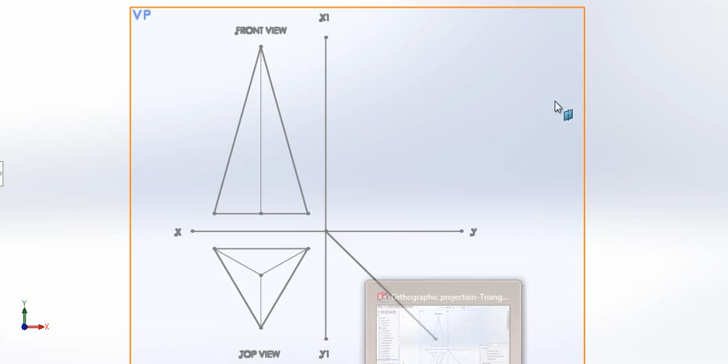Hi there guys, we are back with the orthographic projection of a geometric solid. In our previous videos we've actually shown the actual solid shape, and I'm going to do the same in this video for understanding.

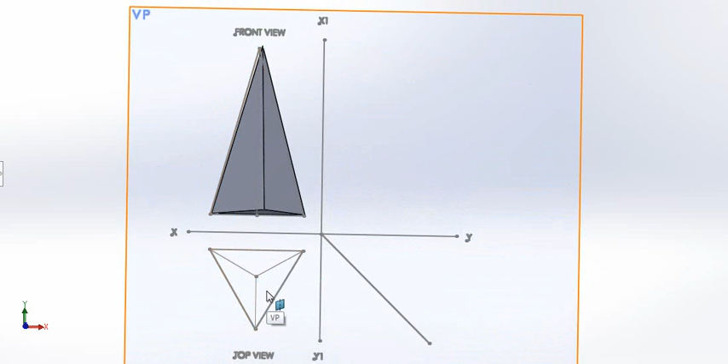You would have seen that you have your front view of your shape, and then we would have drawn the actual top view of the shape, flat on the surface, because obviously you'll have a flat piece of paper and you would have found your top view accordingly. Now we're going to go about the numbering system. I'm a firm believer in a numbering system, because if I have a complex drawing or shape, I can keep track of my actual shape and the necessary points via numbers in the different views.

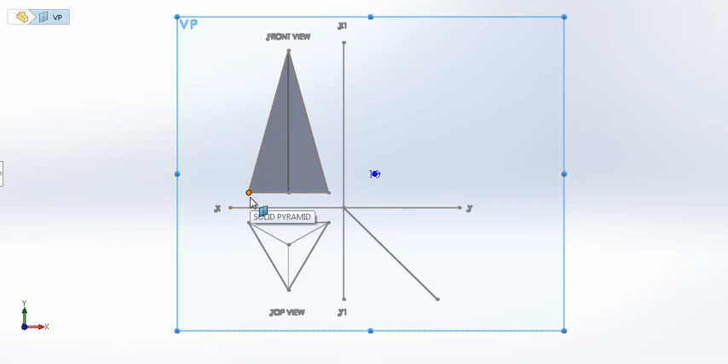So if this would have been number 1 in my front view, then straight away I'm going to have to project number 1 down to find the actual top view. Let's go and see how we do this. Let's hide our solid object, and we are going to go ahead and project.

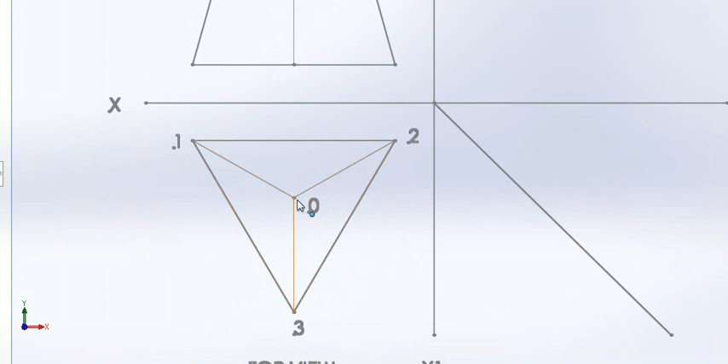First of all, I want to go and give my top view numbers. There it is there. I've given my base points or my base corners numbers of 1, 2, and 3, and I've given the apex a number. Remember, this is the top view of my actual shape, so I'm going to be looking from the top, and I'm going to be seeing the apex as a little dot over there. I will see the lines going from the base corners to the top, from 1, 2, and 3, and I'm going to be numbering that apex 0.

Okay, so first things first, I'd like to go ahead and project those numbers straight up to my front view. So there you can see that number 1 is in line with number 1. That is very necessary, because if I'm looking from the front view, I would need to see that number 1 is in fact in the actual same position.

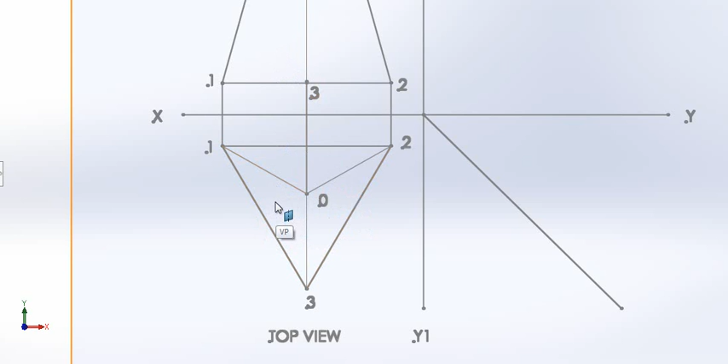Remember that if my shape moves in my top view, it would be correct to say that my front view would also be moving at the same time, because this is the actual front view and that's the actual top view of the same shape. So if I'm moving my top view, my front view would have to move at the same time.

So there you can see I've projected point 2 up, and it's in line with number 2 over there, and 3 and 0 happen to be in line over here. Therefore 3, projected up from this point to my front view, is found here. But what do we know about 0?

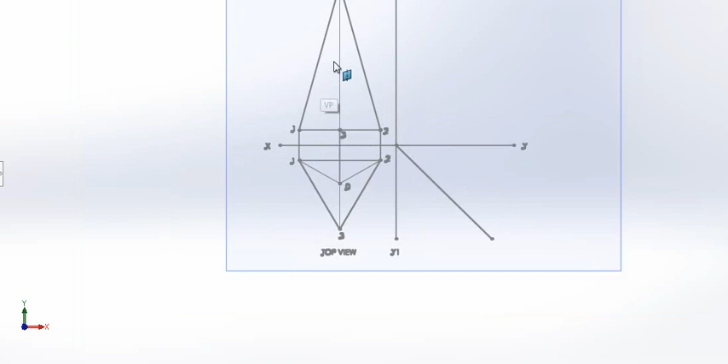We know that it is an apex, which is a whole lot higher. It is also in line. Let's quickly fix that up. There we go, so we have 3 and 0 in line. We have 3 at the bottom. Remember, 3 is a base point or base corner, which is at the bottom of the shape. There we can see it over there, and I know that my apex is situated a little bit higher. Okay, there it is.

Okay, so now once I've actually done that, I want to go ahead and project these numbers across to find my left side view. Let's include those projection lines. First of all, there we have the height of my actual pyramid. There I'll be projecting along the points from my top view to the 45-degree line, and here I'll be projecting it straight up, and remember that would have been the actual 0, the apex.

Let's make them all visible so it's nice for us to see. And for a moment there you saw the left side view.

Great, because we know that when we connect each one of these dots, we will actually see the shape. We have one line that is a little bit of a confusing factor over here, and it would in fact be that line over there.

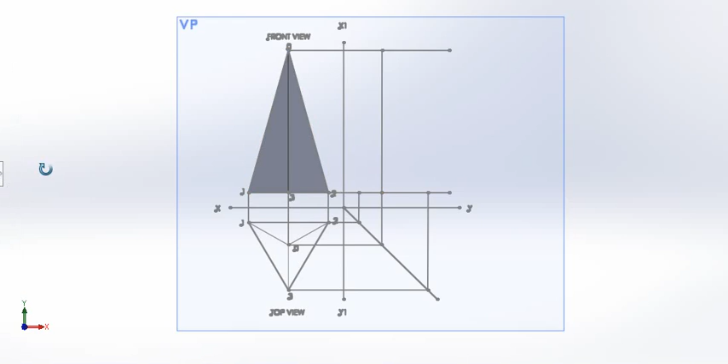We do not see that line, because remember, when we are looking at our solid shape from the left side view, we do not see a line running from the apex down to our base edge. This is a flat surface. We see line 1, 2, and 3.

Let me turn it a little bit more. There we go. Okay, right, so that shape now needs to disappear. Let's stick to a 2D shape and not 3D shapes.

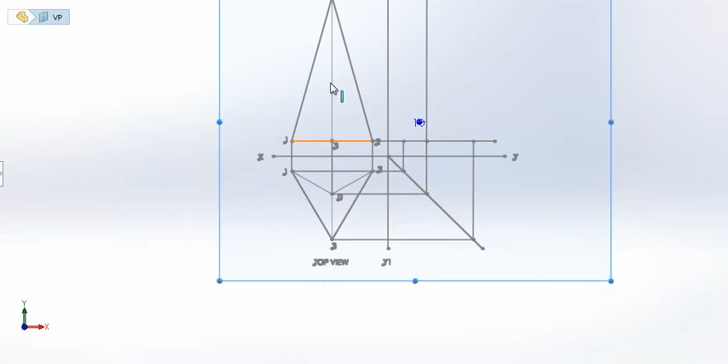Alright, now that we've put in and included all our construction lines, we now need to add up, and we are now working with numbers, like you've seen here, 1, 2, 3, and 0. I've projected them up to the necessary points, 1, 2, 3, and also 0. I need to find those points in my left side view.

So straight away, when I'm projecting this line across over here, this line belongs to 1, 3, and 2. So what I like to do in my drawing is once I've projected this line across any length, I'm going to label that at the end of the line 1, 2, and 3.

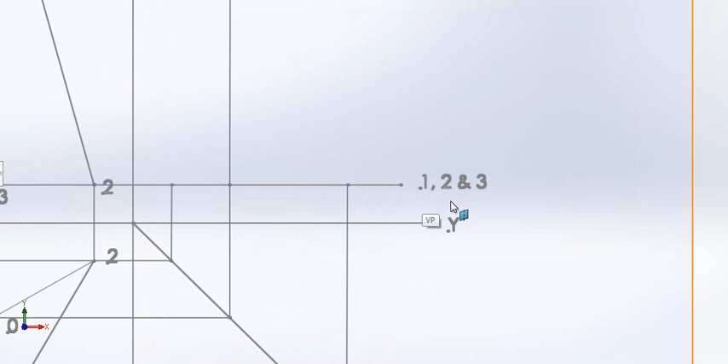Right, so we're going to do exactly the same with 0. There it is there, the apex called 0. I'm going to be projecting that height across, and I'm also going to be labeling the end of that line 0 because that line belongs to the apex.

Right, so once I've done that, I now know that I need to go and find exactly where these lines would collect, where they would connect to find the separate numbers.

Now, please pay attention to number 1 and number 2 over here. I'm going to zoom in there. Number 1 and 2, when I look from the left-hand side, they will be in line with each other. So I won't really see this line over here.

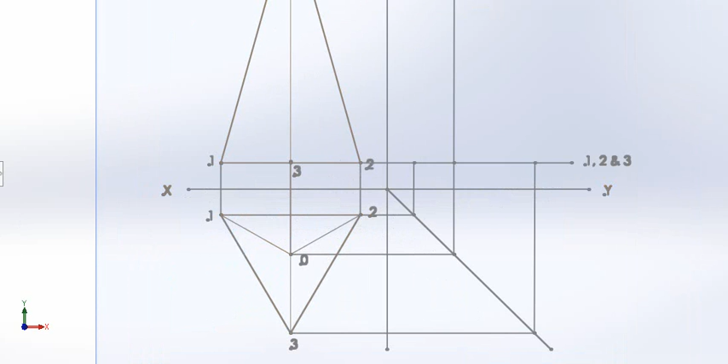I'm going to include the solid shape quickly again so we can make sure of our facts. There it is there. So I'm going to turn it, and you'll see there that when I look from the left hand side, that is number 1 and number 2. Let me just turn it like that. Number 1 and number 2 at the back.

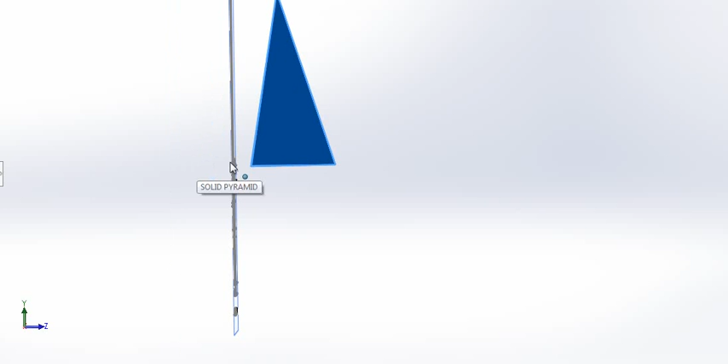When I put them in line, you'll see that I have a left side view, and I'll only see one point. There it is there. So please take note that 1 and 2 is in line with each other.

And there you'll see that 1 and 2, when I project that line across, they're in line with each other, and I'll project 1 and 2 up. I do not have two separate lines. I've got one line going up and across.

Okay, let's get this solid shape away again. There it is.

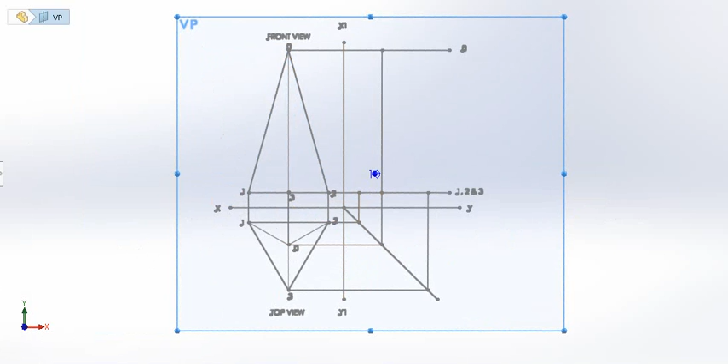Right, now the next part of this is obviously making sure that each one of these numbers are found properly. So as we just explained, 1 and 2 will be in line. So there we go. That line over there represents number 1 and number 2.

And where they then connect with the projection line from the front view for 1 and 2, that will be points 1 and 2. This projection line, number 1 and number 2, are also in line. You can see there, like I have labeled them as well.

And where I find 1 going across and connecting with that line is the dot number 1. And where I find number 2 going across and connecting with that same line that belongs to 1 and 2, I can call that same point 2. Hence my labeling 1 and 2.

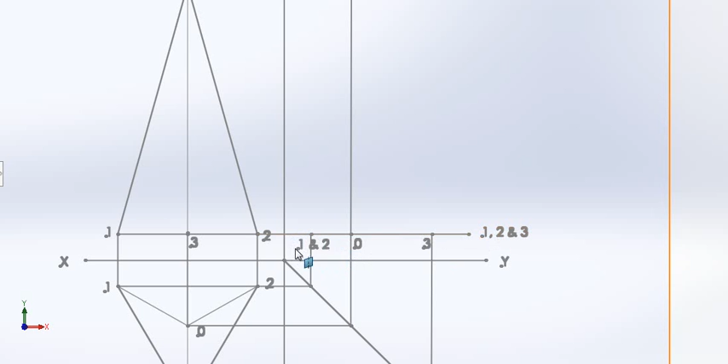Alright, let's look at number 3. Number 3, however, is a single point. It's not in line with any other point. And when I look from the left side view, I only see that one point. I've projected it across and up. And where it connects to number 3's line from the front view, there we go.

We can see that 1, 2, and 3 are on the same line. Hence my labeling. I will be able to find number 3 connecting with number 3's line from our front view on that point over there.

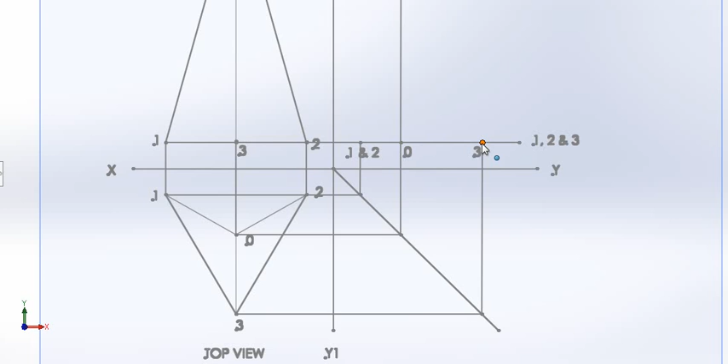Let's look at point 0, which is now my apex. Point 0, there it is in my top view, projected across and up. You'll see that I've labeled it 0 here, but point 0 is not on the ground, it's not on the base, so I can't draw it down the bottom here. This is basically just a reference for me so that I know I can project it a little bit further up, and where it goes further up, you'll see that it falls on line 0 from our front view on that point over there.

I firmly believe in a numbering system because this is quite a simple shape, a triangle with only 3 or maybe that 4th point. But if I had a different polygon, for instance a hexagon or an octagon, it starts getting more complex and I need to keep track of more points. So numbers are definitely going to play a big role.

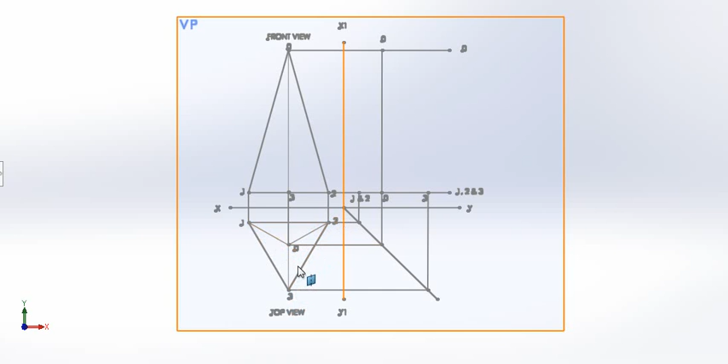Once I've got those points, I can now go ahead and join them. This is exactly what we want, a confirmation system for us. 1 joins to 3 with that line, 1 also joins to number 2 with that line, and 2 joins to 3 with this line.

Let's confirm that those are all base edges, found at the bottom. So if number 1, which is this point here, does it join to 3? Let's have a look. 1 does join to 3 with that line, so I can go ahead and draw a solid line right across to 3.

Let's confirm that 2 and 3 actually do exist. 2 and 3 are connected with this line over here, so I can go ahead and draw a line from 2 to 3.

From the left hand side, being first angle orthographic projection, I will see 1 and 3, and therefore know that 1 and 3 would be my solid line. If point 2 was raised off the ground ever so slightly, then point 2 and 3 would be joined with a line in hidden detail. But in this case, they're nice and flat, we don't have any hidden detail lines, we're simply joining the lines as base edges down the bottom.

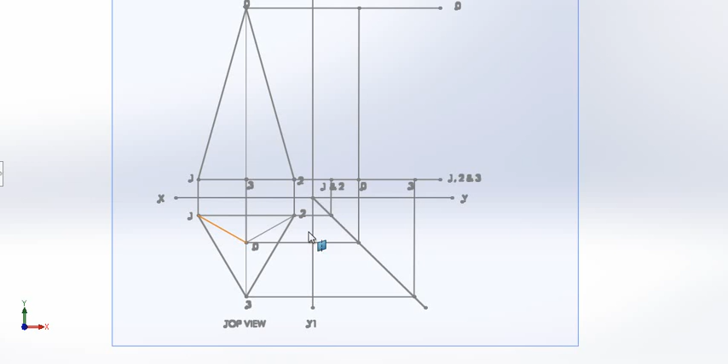Let's confirm, does 1 join to 0? Let's see, 1 to 0 joins with this line here. Correct, it does. So 1 to 0 needs to be connected, draw a line and solid over there.

Number 2 and 0 is connected with a line which is in line with 1 and 0 when seen from the left side view, so it will be 0 and 2, exactly the same line. And then 3 and 0 will also be joined. Remember, this line here is only seen because it's a projection line, so we have constructed that line.

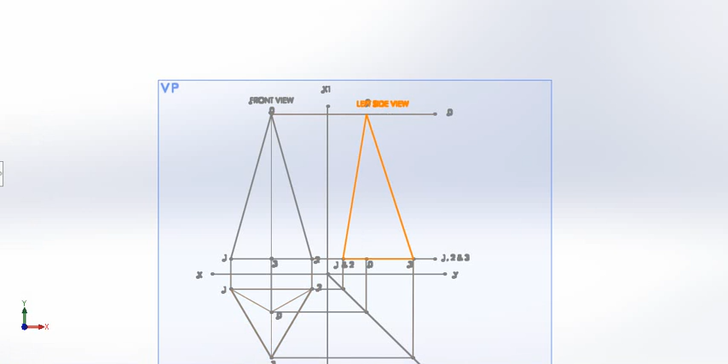I'm going to go ahead and take it away for our common sense sake, and we're going to go ahead and join the necessary lines to find the left side view. There we go, alright, so let's take away the actual projections.

Now I have the exact numbering system coinciding with every view. Let's see, I think I've got more projection lines to take away. There we have it.

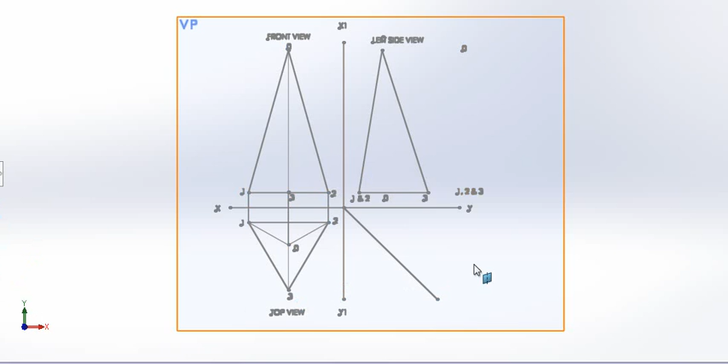I don't really want to take too many numbers away, so let's just put those back. There we go. So we have 1, which is in line with 1, it's at the bottom. 2, in line with 2. 3, in line with 3. 0, in line with 0.